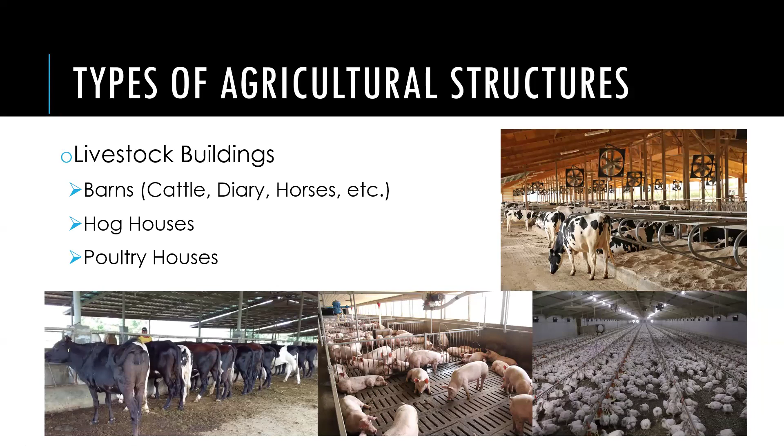Then meron tayong mga product storage building. We have the granaries, mga silos, vegetable storage, fruit storage, and beans. Dito naman natin ini-store yung mga na-harvest natin na commodities.

We also have crop production buildings such as greenhouses. Dito naman tayo nagpo-produce ng crops. Ba't ba tayo nag-greenhouse? Para ma-protect yung ating crops from the outside environment and mga pests.

Meron din tayong mga food and crop processing buildings such as milk houses, slaughterhouse, grain dryers, pasteurizing and bottling plants, fruits and vegetables production and packing. So sa mga buildings na to, dito natin pinoproseso yung mga commodities natin, mga crops, and syempre yung mga livestock.

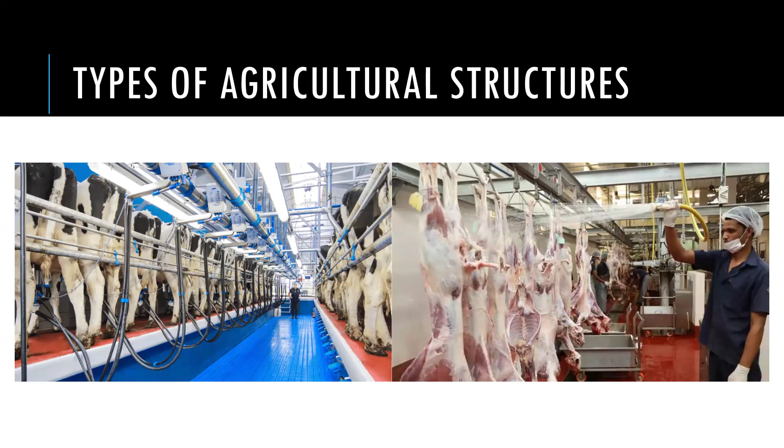So here we have a milking parlor, and we also have slaughterhouse. Meron tayong mga miscellaneous structures such as fences and mga manure pits.

So, basic structural elements. Meron tayong mga basic structural elements such as mga tension members, beams, compression members, and combined members. So these are present doon sa mga nabanggit nating structures kanina.

When we say tension members, ito yung mga tension structural members subjected to tensile strength. Example, itong tie rod na to and itong mga hangers. So they are all subjected to tension.

Next, we have beams. So these are structural members subjected to loads perpendicular to the long axis of the members. Normally in horizontal position, but sometimes found in an inclined and vertical position. So ito yung mga beams natin, mga biga.

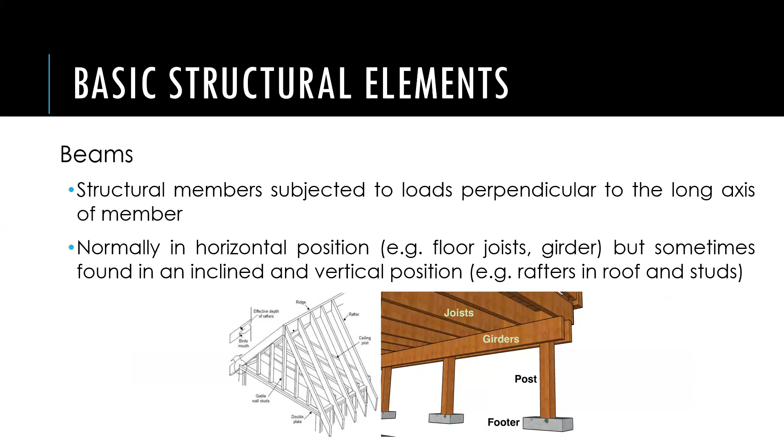Then meron tayong mga compression members. Vertical members that resist axial compression load. So ito naman yung mga columns natin. Ito mga to, ito yung mga beam. Then we have the column.

Then we also have combined members. So these are members that are subjected to the combined effects of compression and tension and bending.

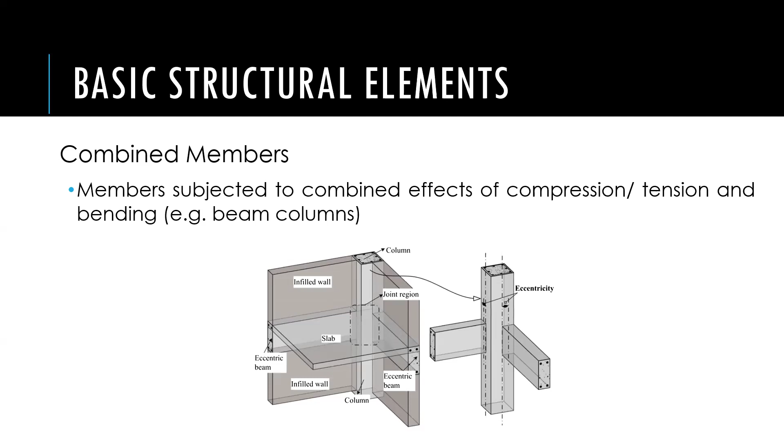When we say tension, results from a force that tends to stretch or elongate a member naman. So pag pinahaba yung member, tension naman yun.

Then we also have shear. Results from the tendency of two equal and parallel forces acting in opposite directions to cause adjoining surfaces of a member to slide on one another. So pagka-shear, parang compression or pwede rin siya parang tension, pero hindi magkasalubong, tawag dito, hindi magkapantay yung force. Kaya nagkakaroon ng shear deformation. Unlike sa tension, pahaba, sa compression naman, paikli yung mga members.

So stress is an internal resistance to an external force. Ang assumption natin kapag stress, uniformly distributed over the area and load is axial or perpendicular to the area. So the formula for stress is P over A, or external force over area.

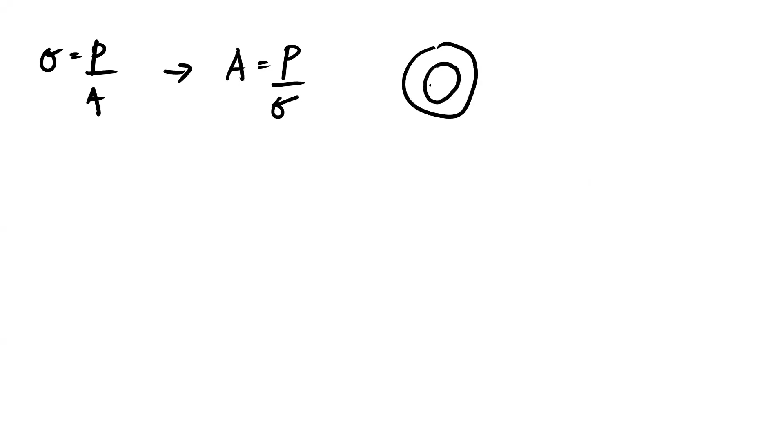So gawin natin, area is equal to P over stress. So ang area ng tube ay area ng outside minus area ng inside. Or pwede natin gawing pi, tapos d na malaki, d outside squared minus d inside squared, all over 4.

So is equal to dun sa force. Ano ba yung force natin? Yung load natin, tensile load is 400 kilonewton. So gawin natin. By the way, given na naman yung smaller diameter natin, no? So ito ay 100 mm squared.

That's squared. Is equal to 400,000 Newton. So ginawa ko ng Newton over 120 MPa. So bakit ganito yung ginawa natin?

Yan. So pwede natin itong gawing times 1,000,000. Yan. Gawin natin Pascal, parang Newton, Pascal, mm squared. So mm din yung makuha natin. Or pwede rin namang 120 megapascal. So automatic ang makukuha natin dyan is in mm.

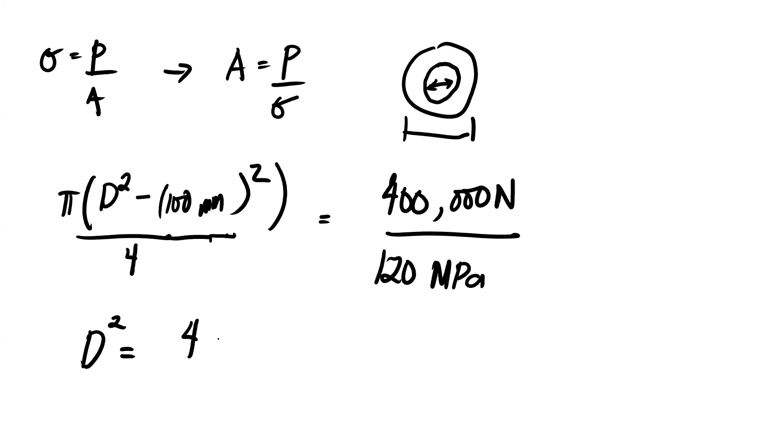D square root ng... balikan ko. 4 times 400,000 divided by 120.

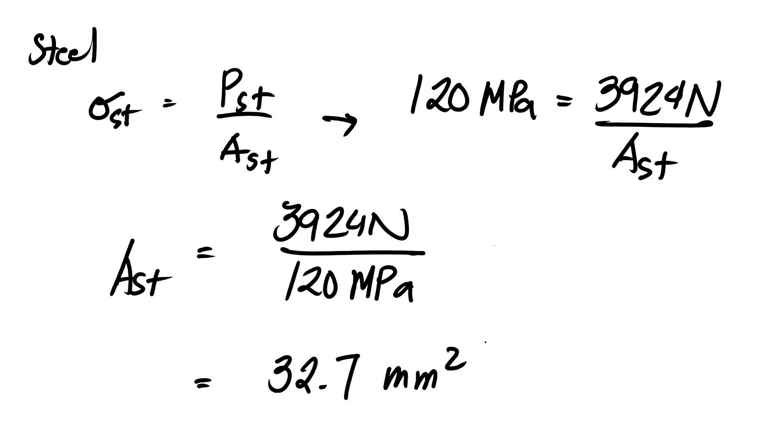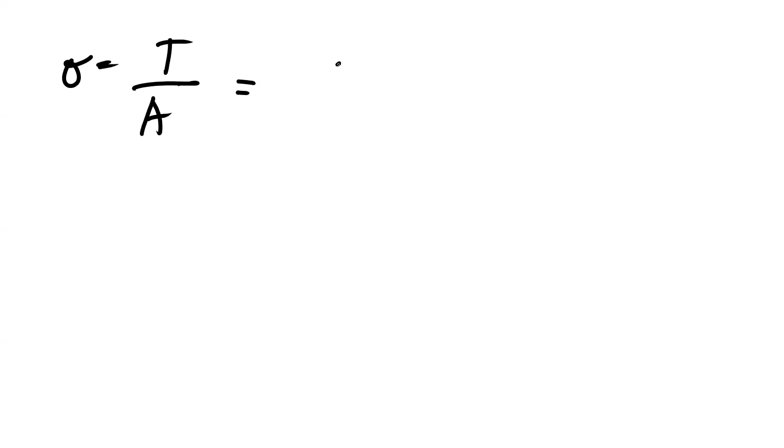So ang tension natin is 2957.134107 pounds divided by yung area, diameter is 0.6. Ito bilog to, 1/4 or pi over 4. Pi times 0.6 inch squared over 4. So makuha natin yung stress na equal sa 10,458.72246 PSI.

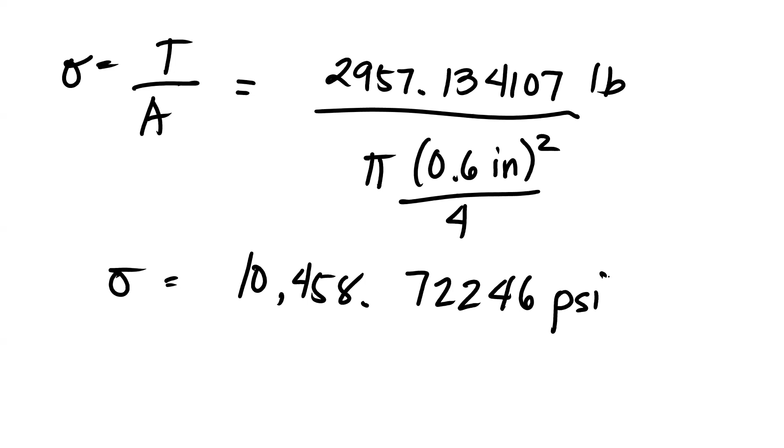Next. A rod is composed of an aluminum section rigidly attached between steel and bronze sections. Axial loads are applied at the positions indicated. If P is equal to 3,000 pounds and the cross-sectional area of the rod is 0.5 square inch, determine the stress in each section.

Okay, so kukunin natin yung stress sa bawat section na to. I-drawing muna natin. So meron tayo ditong rod, which is composed of steel, aluminum, and bronze. Tapos meron silang distance na 2 feet. So may length sila 2 feet, 3 feet, and 2.5 feet.

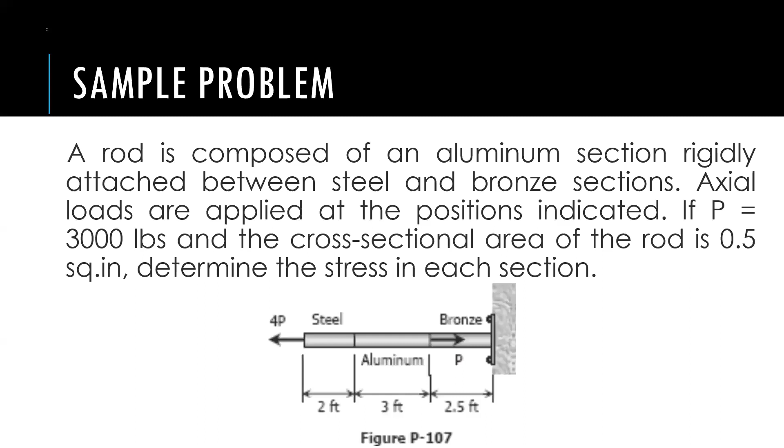Tapos meron tayo ditong force na P at meron tayo ditong force din na 4P. Sabi, P is equal to 3,000 pounds and area ng rod is 0.5 square inch. Area is 0.5 square inch. P is equal to 3,000 pounds. Okay, so paano natin ito isosolve? So una, solve muna natin yung kaunahan. Dito tayo magsisimula sa 4P kasi nandun yung external force na nahila.

So sa steel muna tayo, kunin natin yung stress. Stress is equal to anong force sa steel? So 4 times P pounds over 0.5 square inch. Kaya ang stress dito is equal to 24,000 PSI. Or pwede tayong gumamit ng ibang units, 24 KSI, kilopound per square inch. So may ganyan tayong unit.

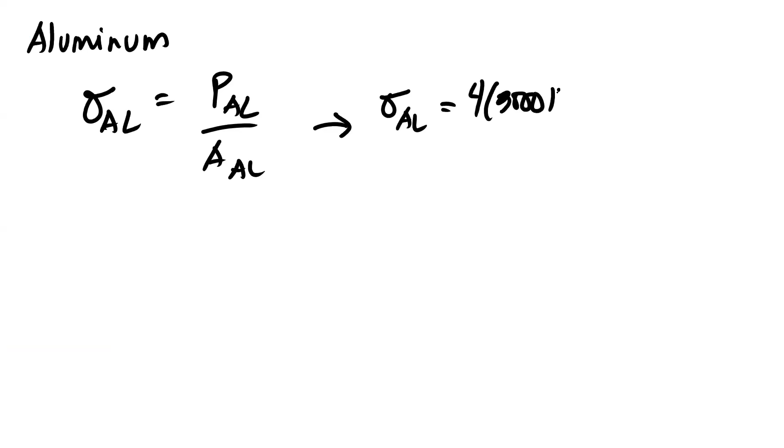Next naman, for aluminum. Kung babalikan natin yung figure, ito ay magre-react ng papaganito. Siyempre, dapat balanse. So since 4P yung reaction nito, therefore yung reaction din nito is 4P, para balanse yung ating equilibrium. So yung stress sa aluminum is equal to the force sa aluminum over area ng aluminum, which is equal sa 4 times 3,000 din over 0.5 square inch, which is the same na 24 KSI.

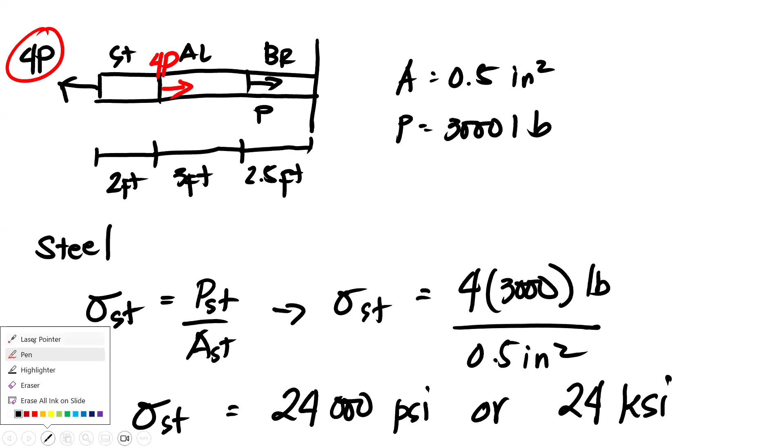So next for bronze naman, kung babalikan natin itong figure na to, kung nag-exert si aluminum ng 4P dito, mag-exert din ng 4P para in equilibrium. Kaya lang, since meron tayo ditong P, ibig sabihin yung force kay bronze ay isang papuntang 4P tsaka isang opposite, so 3P lang yung force kay bronze. Kaya kung sasolve natin siya, we have stress ng bronze equal sa force ng bronze over area ng bronze. So equal sa 3 times 3,000 pounds over 0.5 square inch. So ang stress kay bronze is equal to 18 KSI.

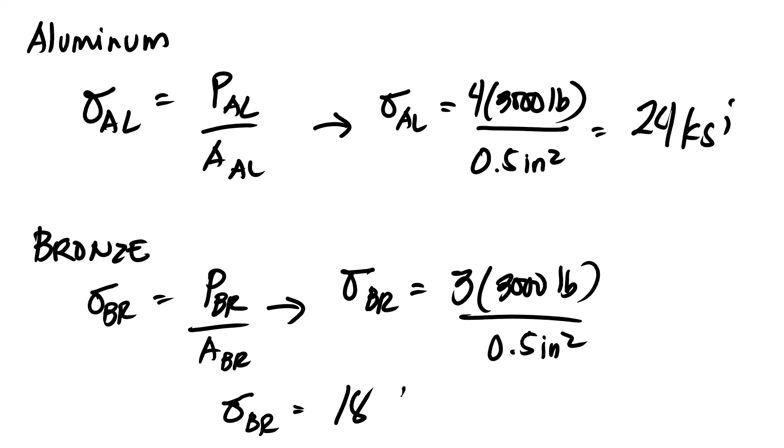Next. An aluminum rod is rigidly attached between a steel rod and a bronze rod. Axial loads are applied at the positions indicated. Find the maximum value of P that will not exceed the stress in steel of 140 MPa, in aluminum of 90 MPa, at ang bronze na 100 MPa. So let's try to draw this figure.

Medyo similar din naman yung magiging approach natin dito. So meron tayo dito bronze, meron tayong aluminum, at meron tayong steel. So this is 2.5 meters, 2 meters, so 1.5 meters. Meron yung force na 2P, dito may nagka-counter yan na P, dito naman 4P. Okay, so given din yung mga area nila.

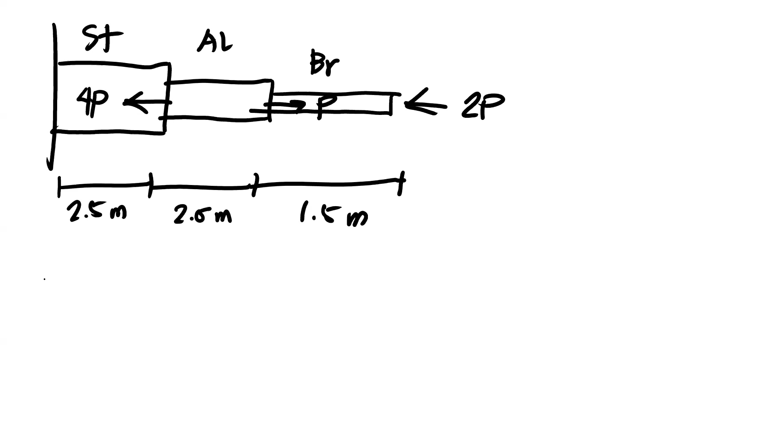Okay, unahin natin syempre yung kay bronze kasi nandun yung external force. Kukunin natin ang kabaligtaran naman ito, kukunin natin yung force dito. Okay, so hanapin natin yung value ng P. Paano natin gagawin yun? So yung force kay bronze, yung stress kay bronze is equal to force over area.

So, since missing yung force, given naman yung stress niya. Ano bang stress kay bronze? 100 MPa, no? So, 100 MPa times, is equal na lang. So, nawawala yung force.

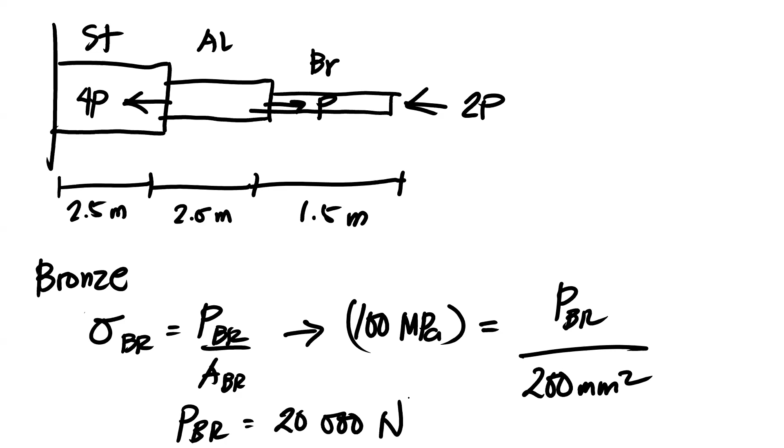Yung area naman ni bronze ay 200 mm squared. Force ni bronze. So, ang force kay bronze ay makakuha tayo ng 20,000 Newton.

Okay? Kaya lang, yung force kay bronze is equal to 2P. Therefore, ang hinanap natin is P, which is equal to 20,000 over 2. So, 10,000 yung makukuha nating, 10,000 Newton yung makuha nating P.

Okay. So, balance lang ngayon dito. So, since nag-counter na tong P na to, so, balance na siya.

So, para naman kay aluminum, so, di pwede natin kunin, no? So, stress ni aluminum, force kay aluminum, which is, pag nakita natin dito, P lang yung force niya. So, P na kay aluminum over area ni aluminum. So, stress kay aluminum is 90 MPa. Equal siya sa P aluminum over, ang area ni aluminum ay 400 mm squared.

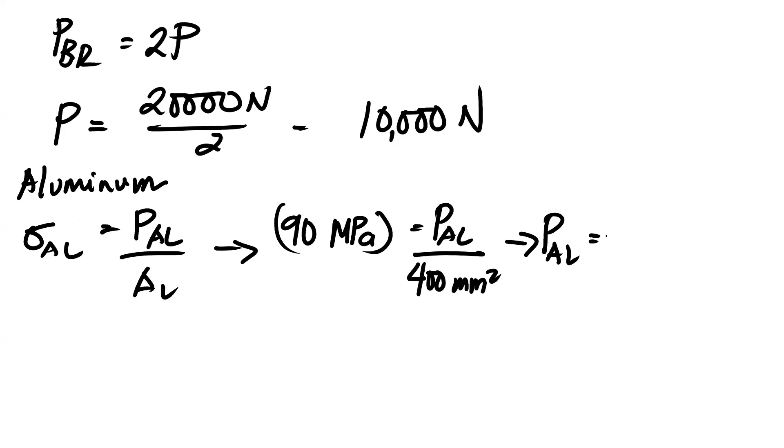So, kaya P aluminum is equal to 36,000 Newton. Okay. So, last, for steel.

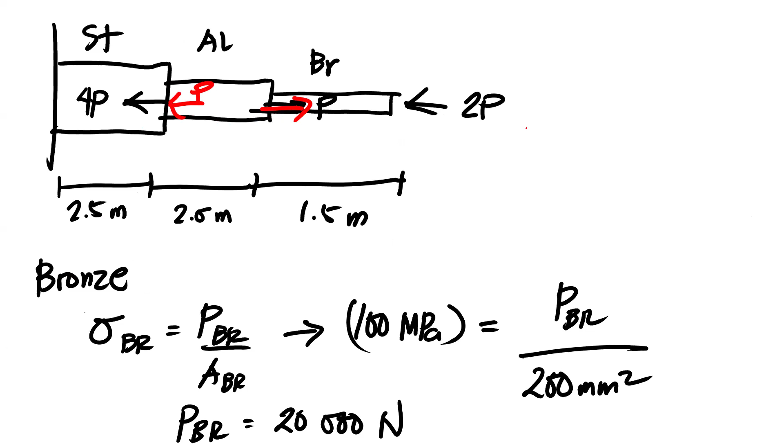So, since meron tayo ditong force kay aluminum na kapag ganito, so meron din siyang force dito para maging equilibrium na P. So, therefore, yung total force kay steel is equal to 4P plus P. Kaya magiging 5P na yung total force kay steel.

So, stress ni steel is equal to force ni steel over area ng steel. So, equals to sa ang steel ay nasa 140 MPa. Ang kanyang maximum is equal to sa, gawin na natin itong 5P. Over ang area natin ay 500 mm squared.

Therefore, P is equal to 14,000 Newton. Okay, so nakuha na natin yung mga dito, forces. Okay, next.

So, hindi pa pala tayo tapos dito kasi find the maximum value of P na gagamitin natin. So, based dito, ang gagamitin nating P ay 10,000. Okay? So, since yun yung safest value natin, pinakamababang value. Kasi kung 14,000 yung gagamitin natin, magpe-fail si bronze at si aluminum.

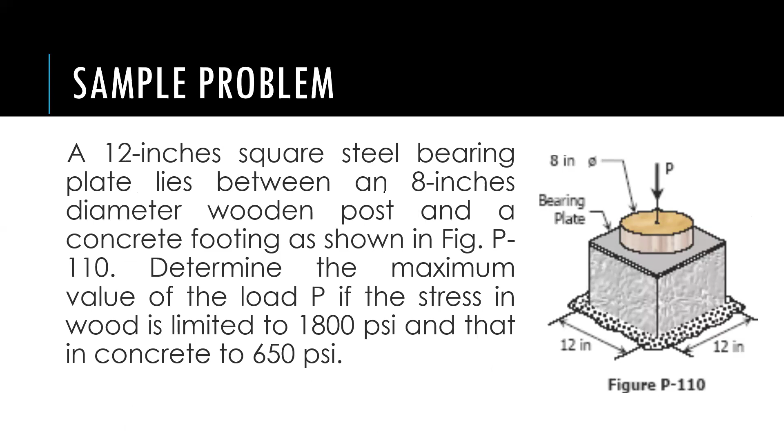So, next, 12-inch square steel bearing plate lies between an 8 inches diameter wooden post and a concrete footing as shown in the figure. So, determine the maximum value of the load P if the stress in wood is limited to 1800 psi and a concrete to 650 psi.

So, paano gagawin natin dyan? So, una, it's so for wood. So, para sa wood, so yung stress ni wood is equal to force sa wood over area ng wood.

So, given lang yung kanilang maximum allowable stress. So, si wood ay nasa 1800 psi equal to sa force kay wood over area ni wood. So, si wood ay bilog, it has a diameter of 8 inches. So, pi, 8 inch squared over 4.

So, ang force natin kay wood is 90,477.86842 pounds. Okay? So, tingnan naman natin para kay concrete.

So, para kay concrete, so, stress ni concrete is equal to force ng concrete over area ng concrete. So, stress ni concrete ay nasa 650 psi equal to sa force kay concrete over area ng concrete. So, ang concrete natin is 12 by 12 inches.

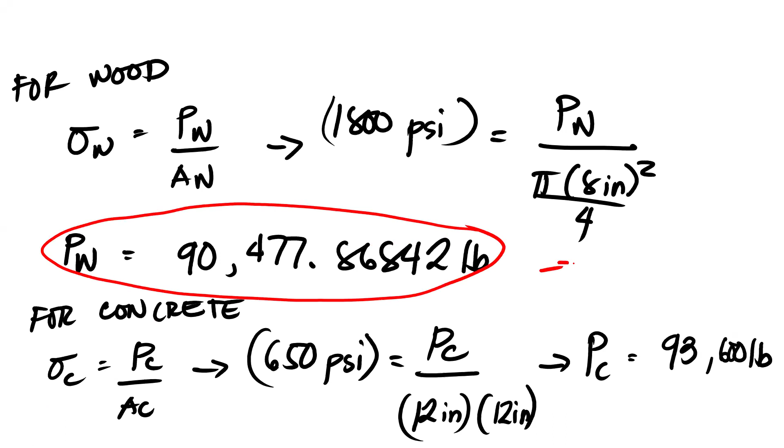So, pag hinanap natin yung P sub C, makukuha tayo ng 93,600 pounds. So, anong safe load na gagamitin natin? So, syempre, ito yung gagamitin natin na safe load. Bakit yan? Kasi mas mababa yung force dyan.

Kasi kung 93,600 pounds yung gagamitin natin, pwedeng hindi pa sira si concrete, pero yung wood natin, masisira na. Next.

Okay, so, i-redraw natin yung figure. Lagyan natin ng force. So, ito is smooth pin, dalawang force sa kay A, kay F naman, roller, isa lang. Tapos, meron tayong 30 kips. Okay?

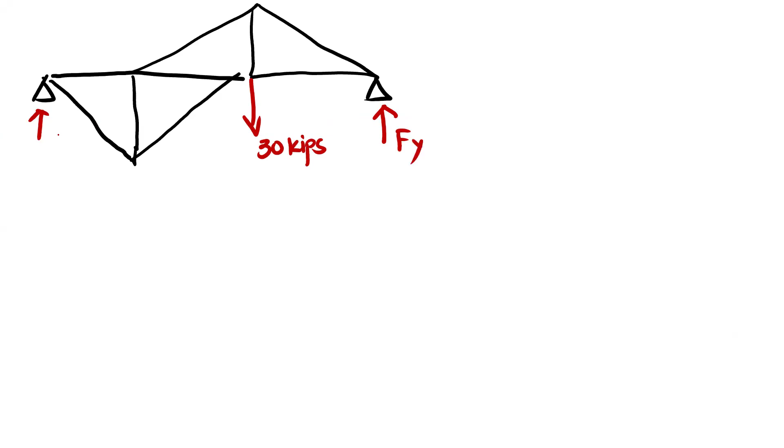So, drawing natin yung mga forces. So, meron tayo ditong 30 kips. Meron tayo ditong isa. Tawagin mo itong FY. Ito, tawagin natin to AY. Dito may AX din. So, lagyan natin ng sukat. 8 feet, 8 feet, 8 feet. So, this is 6 feet. This is also 6 feet. And then, yung mga label. So, this is A, B, C, D, E, F. Okay.

So, paano natin ito isosolve? Okay. So, syempre, pinakauna, isolve natin yung mga reaction forces. So meron tayo AXAY dito, tsaka dito naman, we have FY.

So, kung magsa-summation tayo ng force sa X, nawawala yung AX. So, missing. So, hindi pwede ito. Kung magsa-summation naman tayo ng forces sa Y, missing yung AY, tsaka yung FY. So, hindi rin pwede itong method na to.

So, ang choice na lang natin is to use moment. So, saan tayo mag-moment? So, pwede kay A, pwede kay F. Pero dito, in this case, mas madali sa A mag-moment kasi dalawa yung force missing on A, mahanap agad natin yung sa F. Okay?

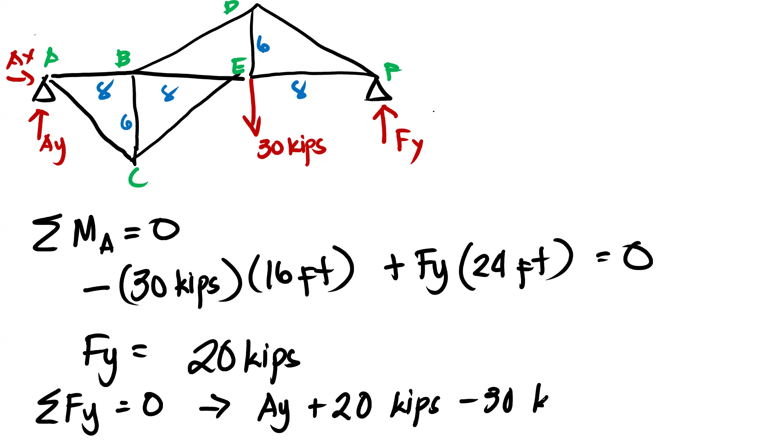We have 20 kips. So next, since nakuha na natin yung Fy, pwede tayo ngayon mag-summation ng force at Y para maging 0. So ano ba yung missing? Meron tayong AY plus 20 kips minus 30... wait, this is not 20,000, this is 20 kips lang kasi naka-1,000 na nga pala to. So 20 kips minus 30 kips. So ang sagot natin dito ay 10 kips.

So tamang assumption natin na pataas yung AY. Next, isasolve natin - since halos okay na yung mga forces along Y, yung X na lang mahirap hanapin kasi wala tayong ibang value. So pwede na siguro tayo mag-calculate ng stresses dito sa CE, DE, and DF. So saan tayo pwede magsimula? Alam ba natin yung kukumpute na mga forces? Compute natin itong CE, DE, tsaka DF - etong tatlong members na to.

Since alam natin yung mga forces dito sa FY, dun tayo magsimula. I-isolate natin yung member na yon. Eto si D, eto si F, eto naman si point E. I-drawing natin yung mga forces acting on those joints. Si F, isa, si Fy, alam na natin to. Then mag-a-assume ako na si DF ay papaganito, si EF ay papaganyan - assumption lang naman yan. Pagka negative yung naging sagot ko dito, ibig sabihin baligtad yung assumption ko.

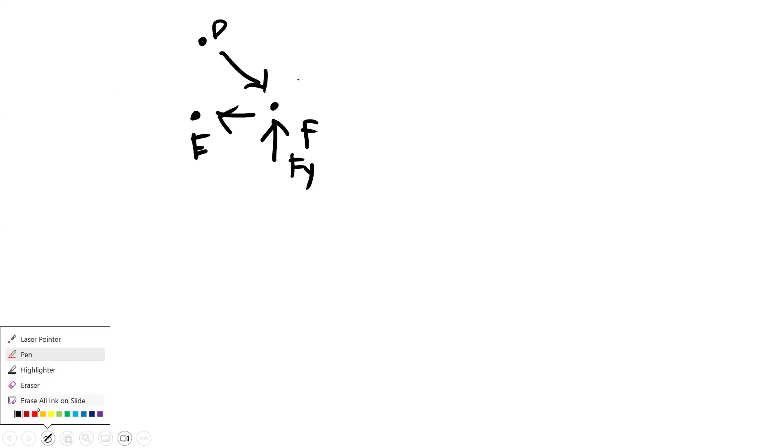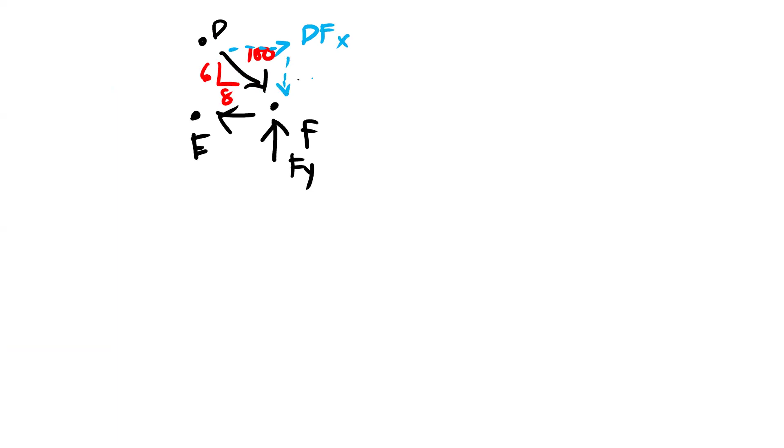Okay, since si DF ay slanting position, at meron tayo similar triangle dito na 6, 8, 10, at 6, 8, 10 - similar triangle yan. So si DF dyan ay meron niyang component na DFX tsaka DFY. Paano natin isosolve si DF? Pabalik lang tayo - tatlo lang naman gagamitin natin: summation of force of x, summation of y, tsaka summation ng moment.

Kung titingnan natin, ang meron lang tayong force dito ay itong 20 kips na vertical, kaya magsa-summation y tayo. At ang mga force acting on this joint lang ay itong Fy tsaka yung pababa natin na DFY, equals to 0. So si Fy ay 20 kips minus yung DFY natin. Paano natin kukunin yung DFY? This is 6/10 times DF is equal to 0. So with that, we can get the value of DF, which is equal to 33.33 kips.

Okay, at since pababa itong DFY, pababa siya sa member, so it is compressing the member or the joint F. So this is compression.

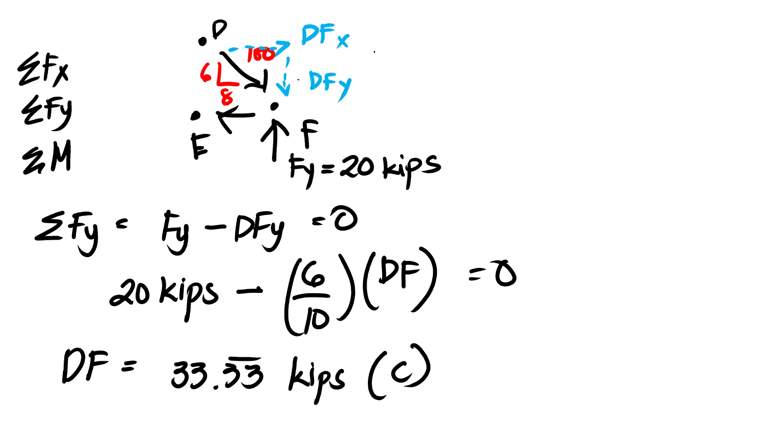Okay, next naman at joint D. Bakit hindi natin sinolve tong si EF? Hindi naman kasi siya pinapasolve eh, so kaya wag na natin i-solve. So at joint D, pag dinrawing natin, this is joint D. Since sa joint F kapag ganito yung force ni D, so kabaligtaran naman siya, no? Pag kay joint D, pataas naman, so tagalin ko na to. Then since kung titingnan natin, ito yung D, E, B, F - symmetrical to, no? So by symmetry, pag ganito si BD, ito si force na DF.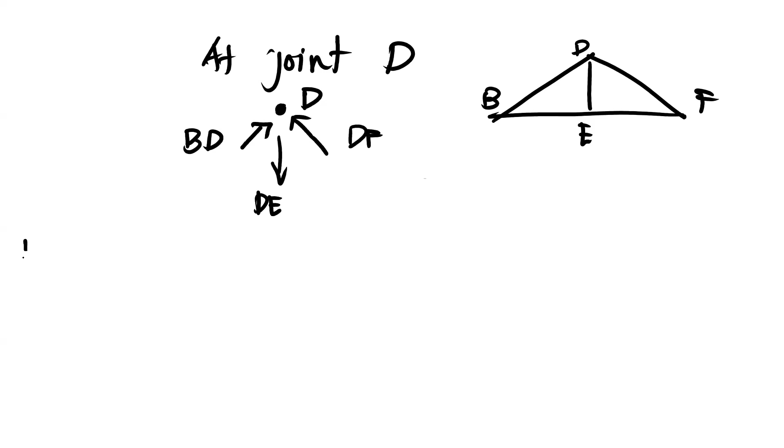And then we have, let's say, papaganto natin ilagay si DE. So by symmetry, force ng BD is equal to DF, which is equal to 33.33 kips. Okay, so ang kulang lang natin is DE.

Paano natin hanapin yung DE? Meron tayo ngayong vertical force, no? Si DF meron siyang force na pataas, pati si BD, so meron na yung BDY tsaka DFY. Since vertical yung mga forces natin, magsasummation tayo ng at Y. Si DFY is equal to - tingnan natin ito by symmetry, or by similar triangle rather. So by similar triangle, this is 6, this is 8, this is 10. Also this one is 6, 8, and 10. Kailangan natin ay yung vertical force. So we have 6/10 times value ni DF na 33.33 kips, plus si BD naman, 6/10 din siya times 33.33 kips, then minus si DE - kasi pababa kaya minus DE is equal to 0. So pag hinanap natin ng DE, makukuha natin ay 40 kips. Since si DE ay palayo kay point D, ito ay tension.

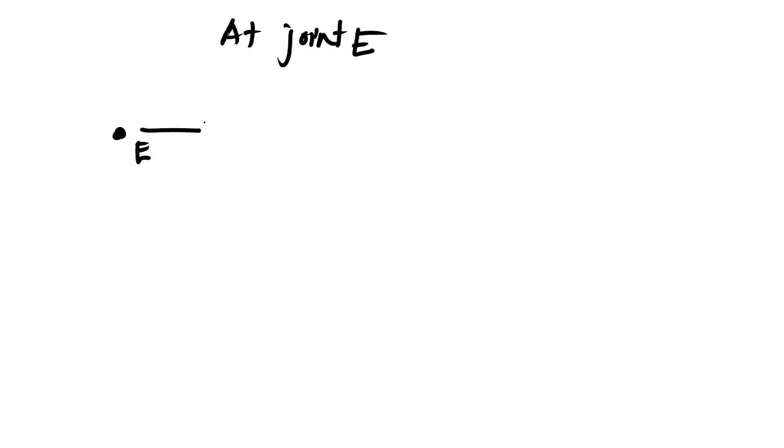Okay, so nakukuha na natin yung mga value. Isa na lang kulang natin, C, CE. So at joint E - pag dinrawing natin yon, ito yung joint E, meron tayo dito papuntang EF, meron tayo dito pataas, so kabaligtad na naman siya kay DE, kasi hinihila nga siya. Si DE nga ay tension eh. Tapos si BE naman dito, hula ko lang to si BE, na ganito yung direction niya. Then meron tayo ditong 30 kips. At 30 kips. Tapos meron tayo ditong CE na naka-6, 8, 10 ulit yung similar triangle niya. So ang kailangan nating mahanap ay yung sa CE. At si CE, meron siyang CEY tsaka CEX na component.

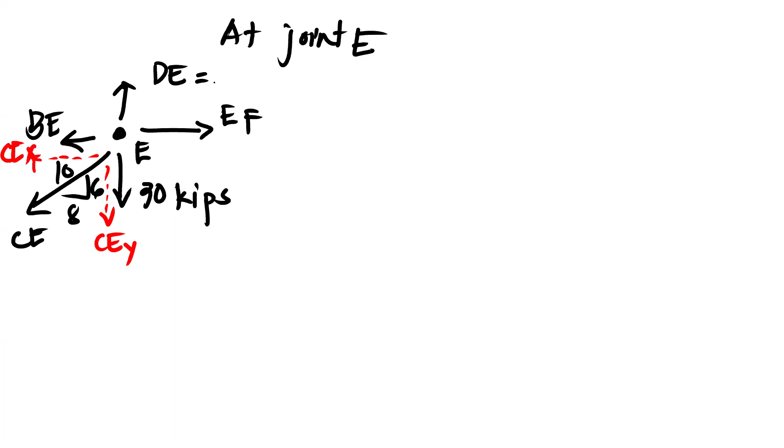Since marami tayong vertical force na alam, si DE ay 40 kips na tension. So para mahanap yung value ng CE, magsasummation tayo ng vertical forces. Summation ng Y, ano-ano yon? Meron tayong negative 30 kips na pababa, positive 40 kips na pataas, at since pababa si CEY, this is 6/10 times CE is equal to 0.

So pag ginanap natin yung value ng CE, we have 50/3 kips. Which is since pababa siya, hinihila niya yung joint E, so this is a tension.

Nakuha na natin yung mga forces acting on each member. Summarize ko lang. Kulang pa pala ako, wait lang. Mag-a-add lang ako ng ano. Okay, nakapag-add na ako.

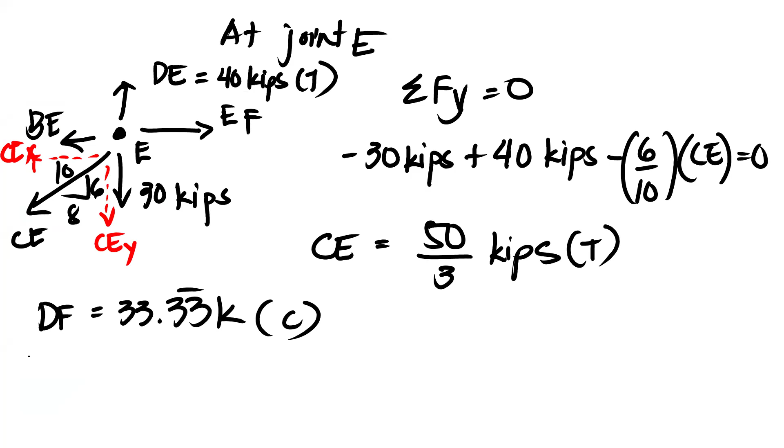I-summarize natin: si DF ay 33.33 K na compression. Si DE naman is 40 K kips - this is compression, this is tension. At saka meron tayong CE na 50/3 kips na tension din. Pero hindi yan yung pinapahanap sa atin.

Kung babalikan natin ang problem, pinapahanap is stress. So hanapin natin yung stress ng bawat member. Stress ng CE is equal to force niya over area na given na 1.8 inch squared. Kaya makukuha natin dito is 9.259259259 kilopounds, K.

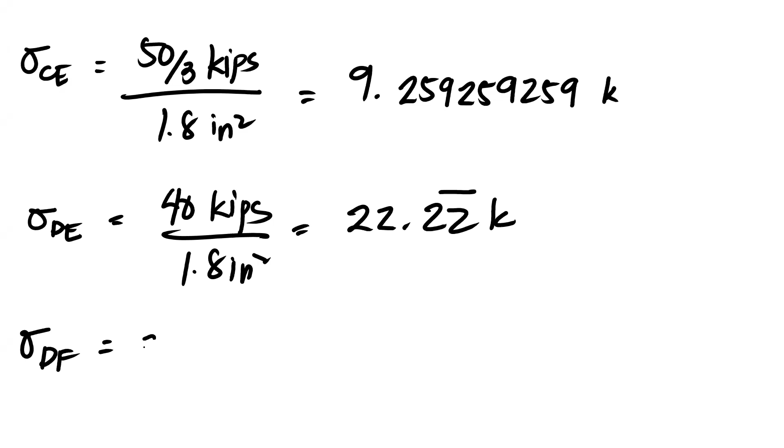Then for DE, 40 kips over 1.8 inch squared, we have 22.22 K. At lastly sa DF naman, meron tayong 33.33 kips din over 1.8, so we have 18.518 na paulit-ulit K. Yan yung mga stresses natin.

Okay, next nating topic naman ay bearing stress. What force is required to punch a 20 mm diameter hole in a plate that is 25 mm thick? The shear strength is 350 meganewton per meter squared. So this is bearing stress, at ang formula pagka bearing stress, V is equal to τA. So V is the shearing force, which is equal to the punching force.

Yung τ naman natin dito, ito yung bearing stress. Given yung shearing strength niya na 350 meganewton per meter squared, hanapin natin yung punching force. Paano natin gagawin yun? Given na 350 to.

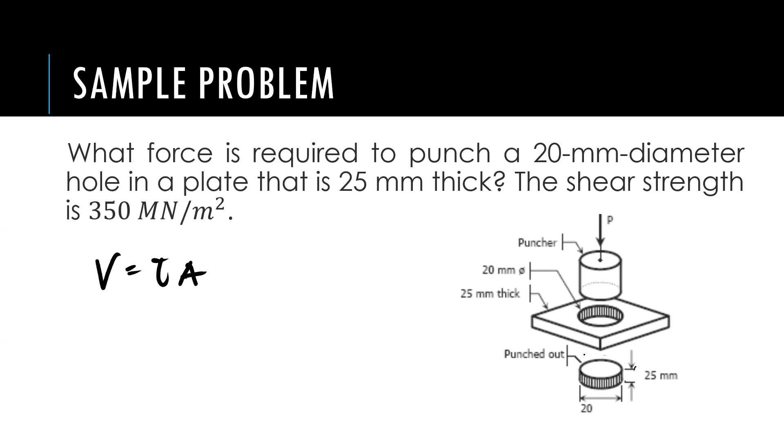Since ito ay pabilog at pagka tinuwid natin, yan ay rectangular. Kailangan natin thickness na diameter - basically ito ay circumference times thickness. Kaya pi times ang diameter natin ay 20 mm times ang thickness natin is 25 mm. Pagka diniretso natin to, automatic ang sagot natin is Newton na lang. So the answer is 549,778.7144 Newton. Ganun lang kasimple.

Next: A hole is to be punched out of a plate having a shearing strength of 40 ksi. The compressive stress in the punch is limited to 50 ksi. Compute the maximum thickness of the plate with a hole of 2.5 inch in diameter that can be punched. And if the plate is 0.25 inch thick, determine the diameter of the smallest hole that can be punched. Magkabaligtad naman, so sa A muna tayo.

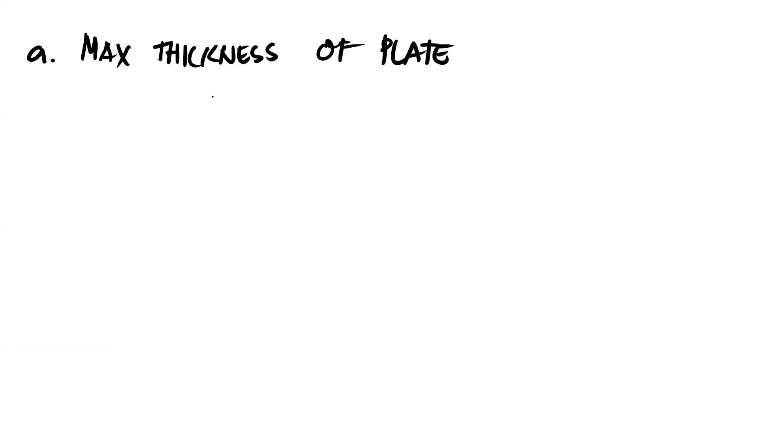Okay, compute muna natin yung max thickness of the plate. Paano natin kukunin yun? Yung stress natin is 50, yung limited - okay, yun yung pinakamataas na force, so yun yung gagamitin natin, hindi yung 40.

Yung P natin is equal to the punching force, which is P is equal to maging PA na to. So P is equal to 50 KSI times pi to area. Ang hinanap natin is maximum thickness of plate with a hole of 2.5 inch in diameter that can be punched. Yung area natin is equal to 2.5 squared pi over 4. So makuha natin na punching strength is 245.4369261 kips. Ito yung punching strength natin.

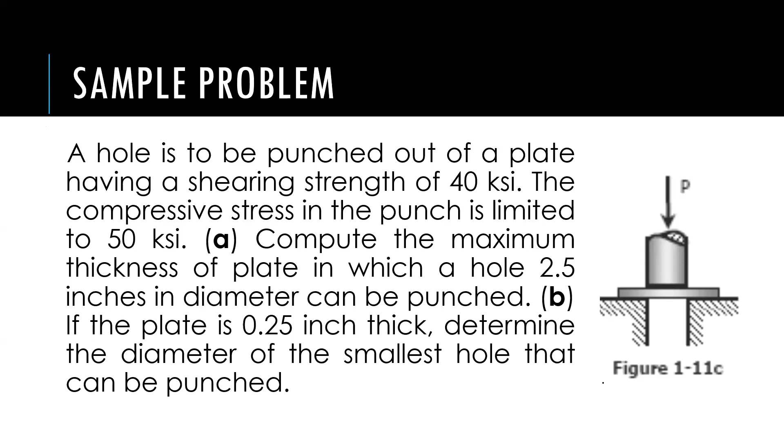Next, letter B, yung 0.25 inch naman yung thick ng plate. Determine the diameter of the smallest hole that can be punched. Kabaligtad naman, so B is diameter of smallest hole. Computin muna natin yung compression nito.

So, yung force na kaya natin is 50, yung limit natin, times pi over 4 times d squared. Hindi natin alam yung minimum area, so pagka i-compute natin, 12.5 pi d squared. Yan yung punching force natin.

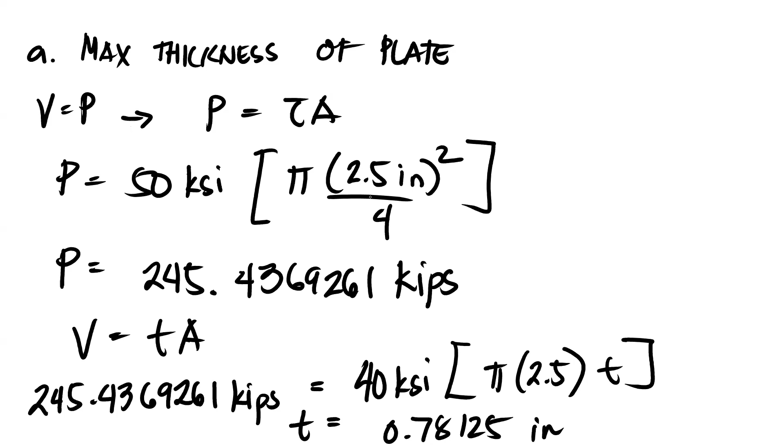Hindi natin alam yung diameter, tapos given yung thickness na 0.25 inch. So pag inanap natin yung diameter, makuha natin is 0.8 inch. Yan yung diameter na kayang i-punch if 0.25 inch thick naman yung plate.

Okay, so that's all for short review ng strength of materials. So next naman natin ay itong materials of construction. Aside from dun sa naituro ko dati na method sa pag-estimate ng mga materials, meron pang ibang formula na pwede nating gamitin. Pero mag-introduction tayo dito.

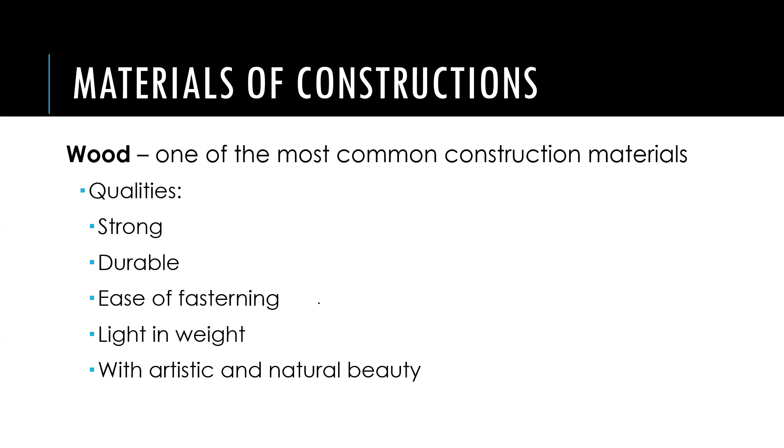Yung wood is one of the most common material na ginagamit natin for construction. It is strong, durable, madali siyang i-process, light in weight, and may artistic natural beauty. Meron tayong mga recommended uses ng Philippine timber depending upon the strength group, from high strength class 1 to low strength class 5. Meron mga end uses yan kung saan magandang gamitin.

Plywood is a material that's made up of 3, 5, 7 or more veneer slices laid one upon the other with grain of each at right angles to those of the sheet above and below. Yung thickness nito can be 3.2, 4.7, 12, 20 with a normal width of 1.2 and a length of 1.8 to 2.4. Normally, ang mga plywood natin is 4 by 8 feet yung kanyang sukat.

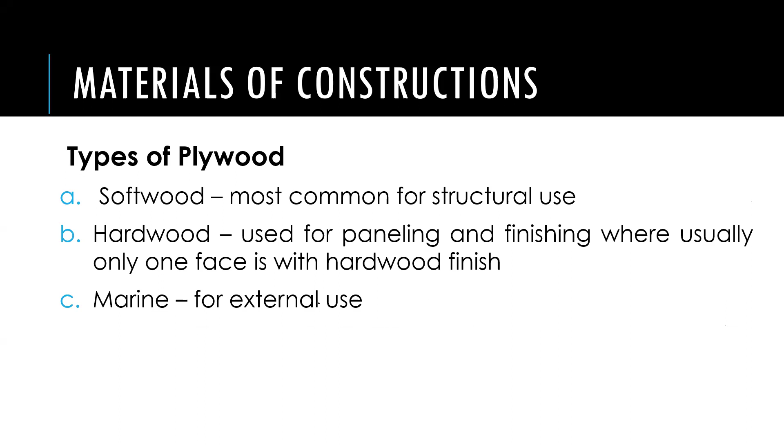We can classify plywood as softwood, hardwood, and marine. Softwood, most common for structural use. Hardwood, used for paneling and finishing, where usually only one face is with hardwood finish. And marine is for external use.

Lumber measurement: wood is normally priced in board foot. One board foot of wood has a normal size of 1 foot length by 1 foot width by 1 inch thick. Ito yung formula natin ng board foot: length times width times thickness over 12. Dapat ang unit nila is feet, inch.

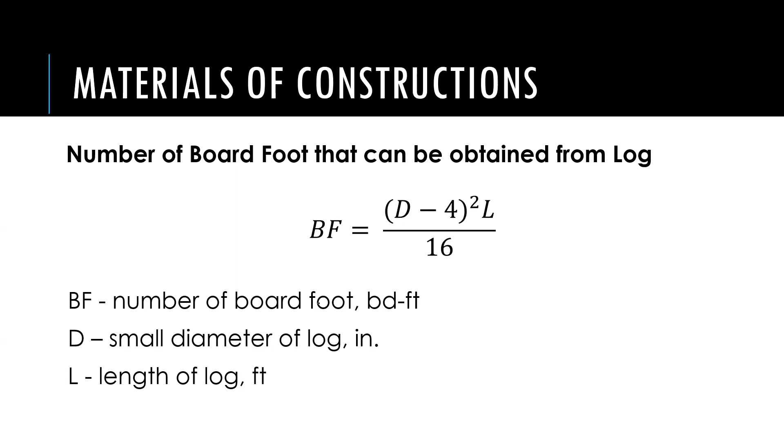Halimbawa, kung meron tayong isang log and we want to determine the number of board foot that we can obtain from that, this is the formula: d minus 4 quantity squared times the length of the log divided by 16. D is diameter in inch, L is in feet.

We also have nails requirement. The weight of the nails is equal to 20 times the number of board foot over 1,000. So let's try this one.

Compute the cost of 50 pieces na 2 by 3 by 12 lumber at 27 pesos per board foot. Kunin natin yung number of board foot. Sabi ay naka feet, feet, inch. Ito naman ay naka feet, inch, inch. Meron tayong feet, meron tayong inch, meron tayong inch. Pwede na nating i-direct sa formula, sa meron tayong feet, inch, inch. So ganun kadaming board foot to? We have 6 board foot.

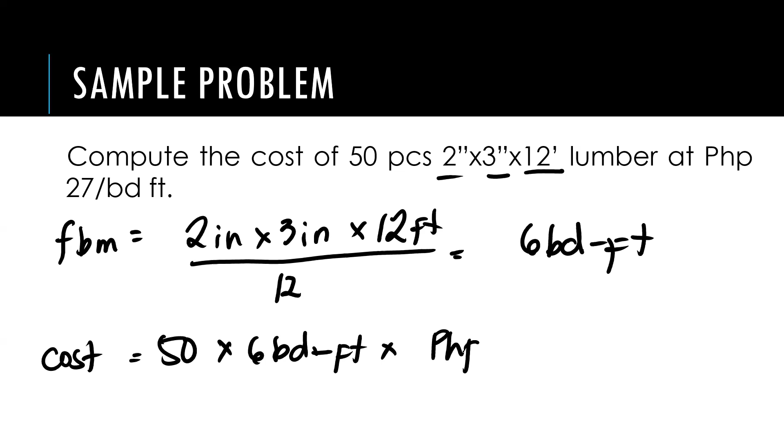Pag kinompute natin yung cost, we have 50 pieces times 6 board foot times 27 pesos per board foot. So ang total cost natin is 8,100 pesos.

Next. A log has a 24-inch diameter and 18-foot length. What is the total number of board foot that can be obtained from the log? Board foot is equal to D minus 4 squared L over 16. Diameter natin is 24, minus 4 squared. Ang length natin is in feet, so this is 18 over 16. So total board foot natin is 450 board foot. Simple lang yung mga equation natin.

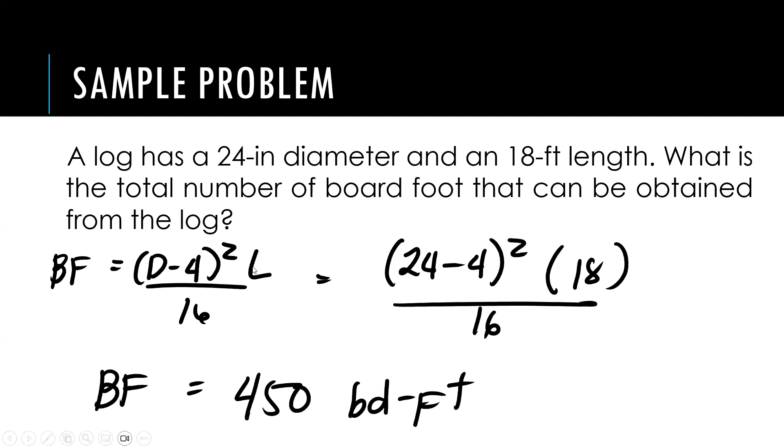Next. Determine the number of board foot that can be obtained with a log of smaller diameter 1.75 meters and 5 meters in length. Ito, mahirap lang ng konti kasi kailangan natin mag-convert. We have 1.75 meters, or gawin ko na itong cm, times 1 inch over 2.54 cm, minus 4, quantity squared, times 500 cm times 1 foot over 30.48 cm, over 16. So total board foot natin dito is 4,318.10141 board foot. Okay?

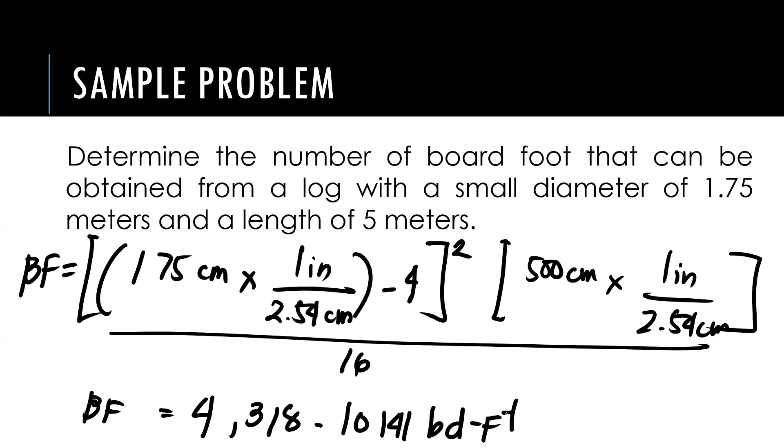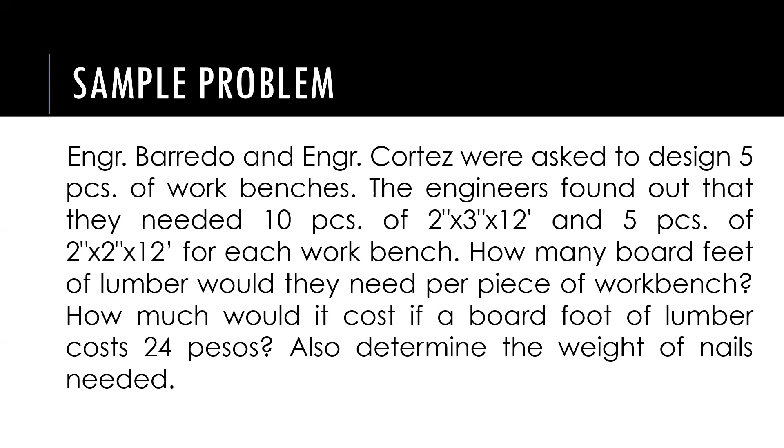So hindi na natin kukunin to since hindi na natin times sa 5 pieces of workbench, kasi per workbench naman. But if we would like to determine the total cost, let's say yung cost per workbench. Kung sa total, we have 80 board feet times 5 bench, so meron tayong 400 board feet para sa lahat. And yung cost niyan, 24 pesos per board feet, so meron tayong 9,600 pesos. Para naman sa number of nails, we have 20 times yung board feet natin over 1,000. So lalabas na ang weight of nails na kailangan natin is 8 kg.

So yan yung mag-estimate ng dami ng board feet at ng weight of nails needed for that project.

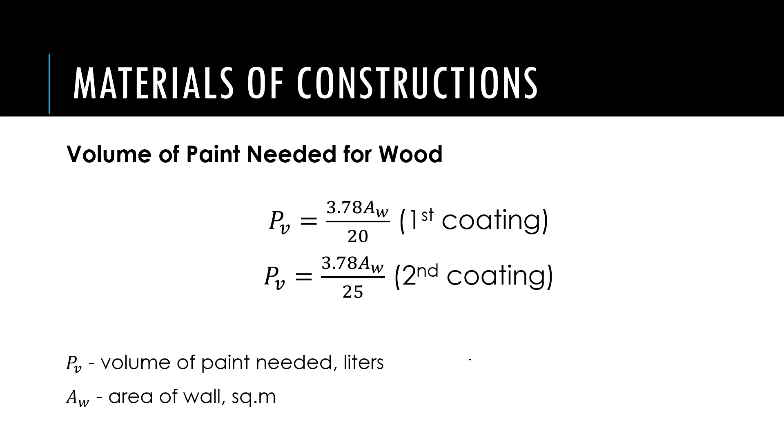Next, we have volume of paint needed for wood. So sa first coating, 3.78 times area ng wall or ng wood over 20. Pagka naman second coating, 3.78 times area over 25. So in liters na yung makukuha natin.

Engineer Motas would like to paint her living room whose dimensions are 10 by 20 by 5. To determine the paint needed, if she will be using white paint for the first coating and neon pink for the second coating. Floor, ceiling, and area of windows are excluded. So yun muna yung assumption natin.

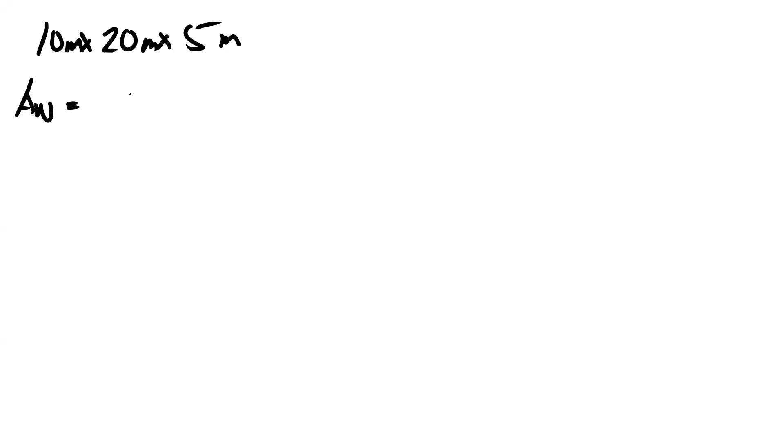So we have 10 by 20 by 5 meters, and yung wall natin, let's compute na lang yung area. So yung total area natin is dalawang 10 by 5 tsaka dalawa ding 20 by 5 meters. So ang total area natin dito ay 300 square meters.

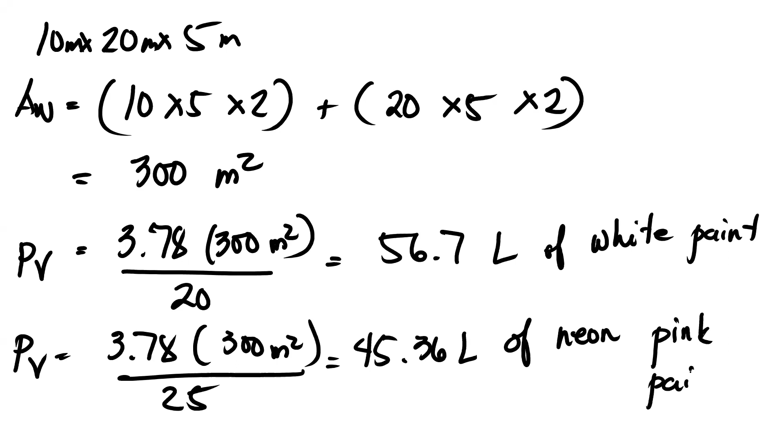So for the volume of paint needed, we have 3.78 over 20, ito para sa first coating. Lalabas dito is 56.7 liters of white paint for the first coating. Para naman sa second coating, over 25 naman to, so kailangan natin ng 45.36 liters of neon pink na paint. Okay, so ganun lang mag-estimate.

So next material of construction is the concrete. It is a combination of cement and aggregate, fine and coarse. Aggregates can be sand, broken stones, or gravel, cinders, blast furnace slag, etc. Concrete is used in footings, wall and column foundations, slabs, pavements, and beams. Concrete is less common in farm structures, and when in use, concrete is always reinforced by steel bars to help the concrete in shear and tension. Ano bang qualities ng concrete? It's durable, hard, mataas yung strength niya in terms of compression, and it can be formed in various shapes.

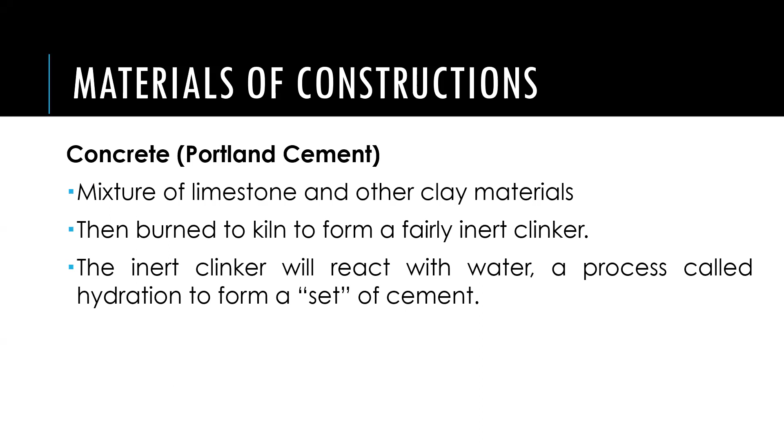So concrete, mixture siya ng limestone and other clay materials. They burn sa kiln to form a fairly inert clinker, and the inert clinker will react with water, a process called hydration, to form a set of cement. So aggregates, applied to sands, broken stones, or gravels na pinagbibind-together ng cement. We have fine aggregates, passes through 1/4 inch screen or 6.35 mm. Pagka naman coarse aggregate, nare-retain sila sa 1/4 inch screen or sieve, so greater than 6.35 mm.

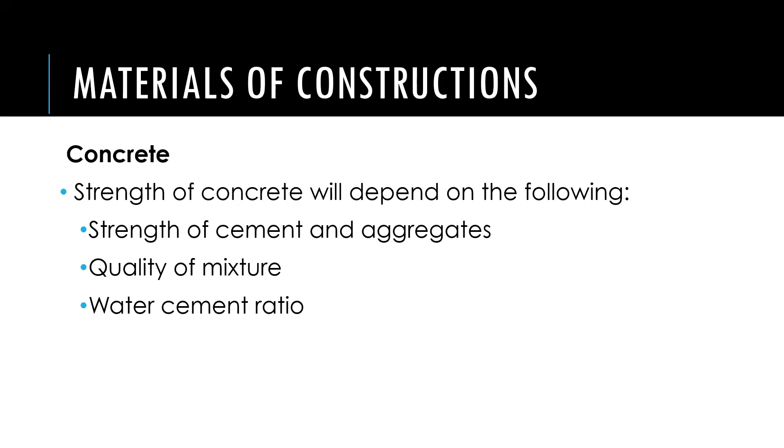So concrete, strength of concrete will depend on the following: strength of the cement and aggregates, quality of mixture, and water-cement ratio. Kapag nag-mix tayo ng cement at water lang, tinatawag natin yung paste. Pagka cement, water, and sand, mortar naman. At meron tayong specially formulated mortar na tinatawag na grout. Ano bang function ng mortar? Used to bond units together, seal spaces between units, ties steel reinforcement and anchor bolts into the wall, and provide design lines of color and shadows.

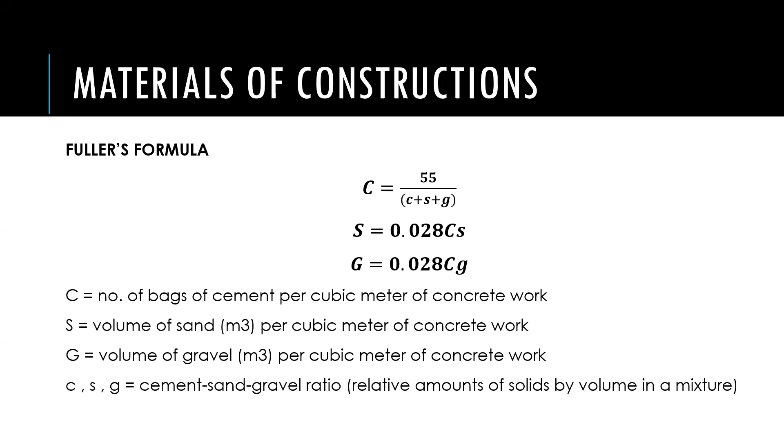Aside from the material estimation na ituro ko, we also have the Fuller's formula, mabilis din to estimate the number of bags of cement, volume of sand, and volume of gravel. Yung C is equal to 55 over C plus S plus G. Ano yung maliliit na C, S, G? Ito yung cement, sand, gravel ratio. And then to compute for the gravel and sand, it is 0.028 CS and 0.028 CG. So ito yung mga mixture, C plus S plus G, pag-a-addin lang natin yung mga yan.

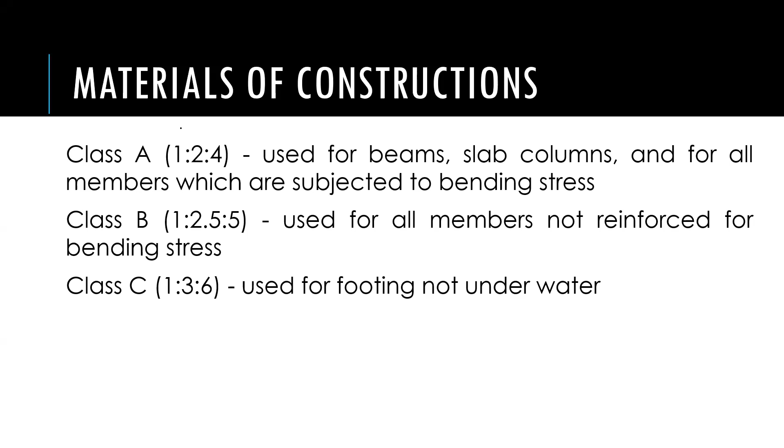So ito yung mga classes natin. Class A, 1 is to 2 is to 4, ito yung cement, sand, and gravel, used for beams, slabs, columns, and for all members which are subjected to bending stress. Class B naman, 1 is to 2.5 is to 5, used for all members not reinforced for bending stress. And Class C, 1 is to 3 is to 6, used for footing not underwater.

CHB, most widely used masonry materials for all types of construction: walls, partitions, dividers, fences, etc. We can classify CHB as bearing or non-bearing. Pagka bearing, its thickness ranges from 15 to 20 cm and are used to carry load aside from its own weight. Pagka naman non-bearing, thickness ranges from 7.5 to 10 cm and are intended for walls, fences.

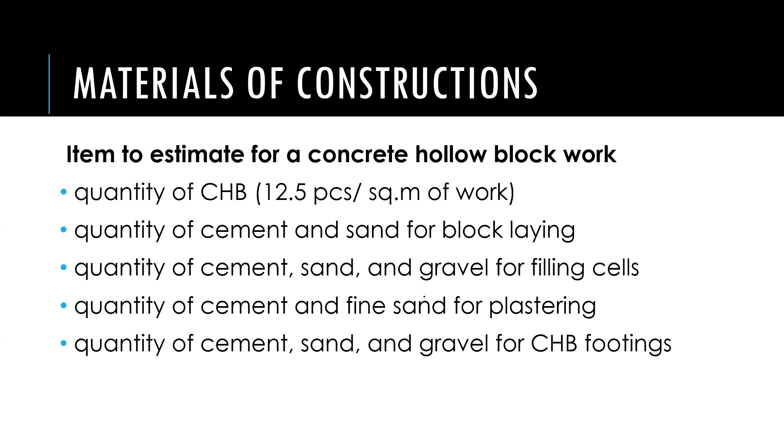So pag nag-estimate tayo for a concrete hollow block wall, we need to quantify the amount of CHB. So ito yung rule natin na there are 12.5 pieces of CHB per square meter of work. Then we also need to quantify the amount of cement and sand for block laying, cement, sand, and gravel for filling cells, cement, and fine sand for plastering, and cement, sand, and gravel for CHB footings.

We also have some rough estimates na there are 100 board foot per cubic meter of lumber, para naman sa cement, 10 bags per cubic meter of plaster. Steel reinforcement, 100 to 120 kilograms per cubic meter of concrete.

Sa roof framing naman, 14 board foot per square meter of roof area. For ceiling framing, 7 board foot per square meter roof area. Sa nails, kailangan natin 20 kg per 1,000 board foot. At sa studding naman, 2 by 3, 4 board foot per square meter.

Okay, sa sidings naman, kailangan natin ng 10.7 board foot per square meter. Para sa flooring, 10.8 board foot per square meter. Floor joist na 2 by 6, 15 board foot per square meter. Ceiling joist 2 by 2, 4 board foot per square meter. Sa purlin naman, 2 by 4 na 4.4 board foot per square meter.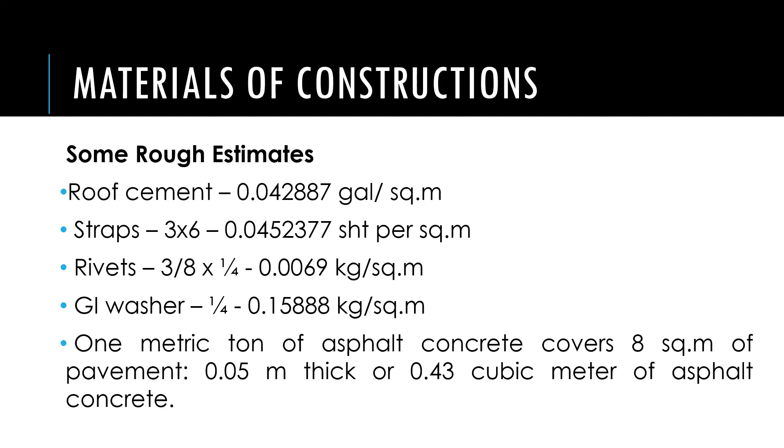1 metric ton of asphalt concrete covers 8 square meters pavement, 0.05 meters thick, or 0.43 cubic meter of asphalt concrete.

Try natin mag-solve ng mga ito. So, Engineer Panabal would like to cement the flooring of their pallet warehouse with a total volume of 1,500 cubic meters. Determine the number of bags of cement and volume of sand and gravel required using 20 liters of water for every bag of cement and a 1:2.5:5 na mixture.

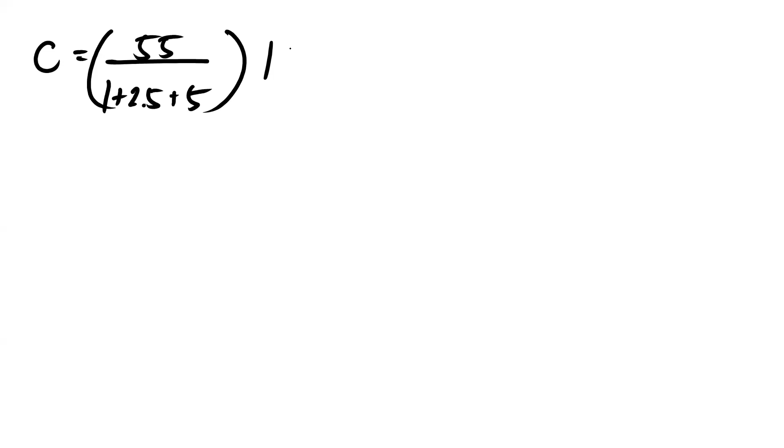So paano gagawin natin? We need to compute for the volume of cement. Paano natin i-compute yung cement? Gagamitin natin Fuller's formula: 55 over C plus S plus G. So ito yung C plus S plus G natin. Then multiply natin ito dun sa volume, kasi itong formula na ito, per cubic meter lang. Kailangan natin i-multiply sa volume ng concrete work.

So ang answer natin dito is 9,705.882353 bags per cubic meter. So yan, wag muna tayo round off.

Para naman sa sand, so formula: 0.028 yung cement natin, times yung ratio ng sand. So this is equal to 679.4117647 meter cube ng sand.

At para naman sa gravel, kailangan natin siyang i-multiply dun sa ratio ng gravel. So, 1358.823529 meter cube.

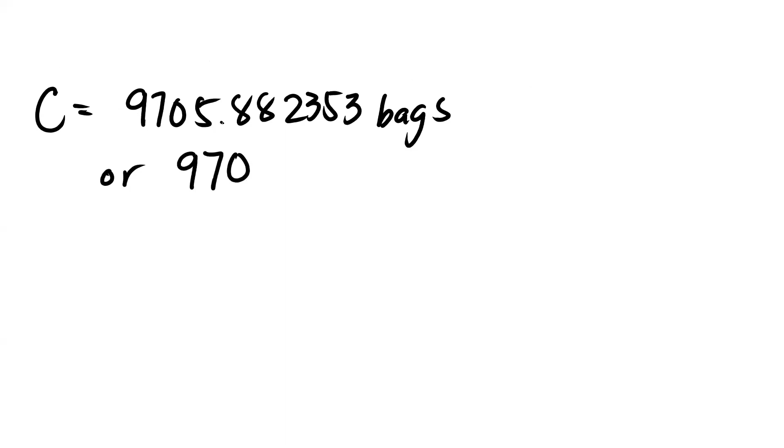So kung isa-summarize natin: cement is 9705.882353 bags. So for round off na natin, 9,706 bags. Sa sand naman, pwede nating i-round off siya ng 680 cubic meters, and sa gravel naman, pwede nating i-round yun ng 1,359 cubic meters.

Okay, so next: Engineer Pejana is going to fence his rectangular lot whose dimension is 250 by 300 meters, and the height of the fence is 2.5 meters. So determine the number of CHB needed.

So kunin natin yung area, no? Area is equal to length times height times 2, plus width times height times 2. So yung area is 250 times 2.5 times 2, plus 300 times 2.5 times 2. So 2,750 square meters yung kailangan nating lagyan ng hollow blocks dito.

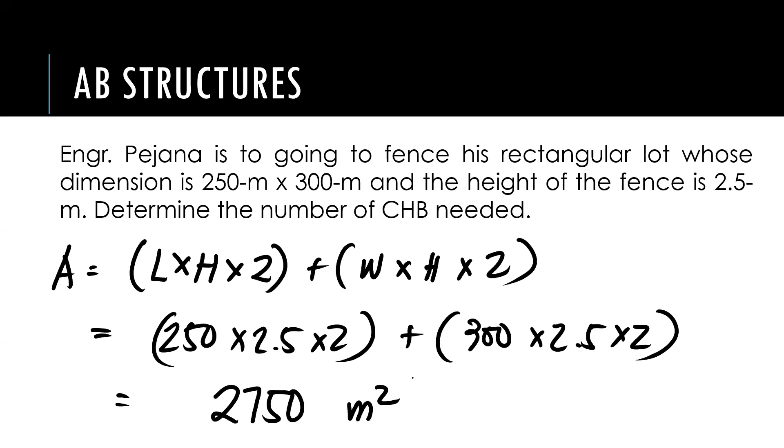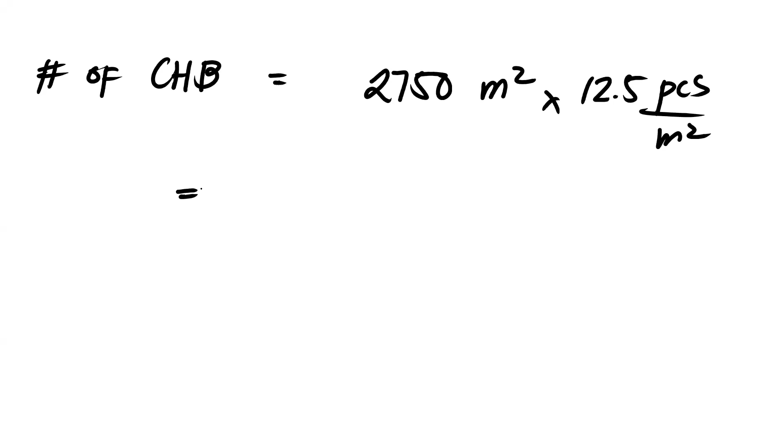Okay, so to compute for the number of CHB needed, basic lang naman. Yung area times 12.5 pieces per meter squared. So pag multiply natin ito, we will have 34,375 pieces na CHB.

Okay, next. Engineer Mendoza would like to build a rectangular room having a 15 by 10 by 3 dimension. Estimate the number of concrete hollow blocks needed, so exclude the foundation. Kunin ulit natin yung area. So we have 15 times 3 times 2, plus 10 times 3 times 2. So yung area of work natin is 150 meters squared.

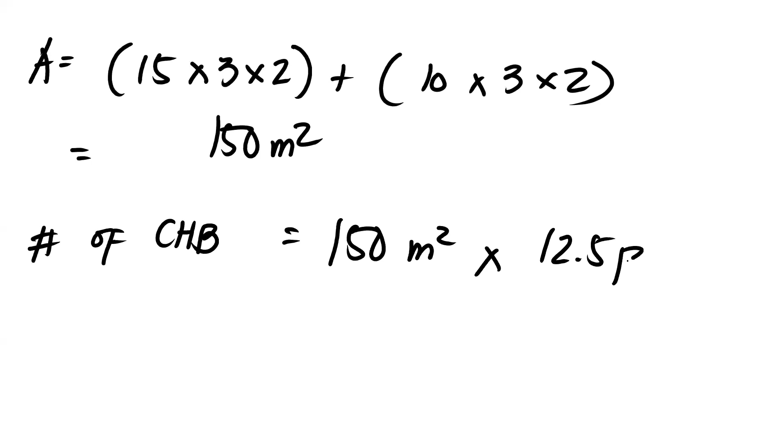So sa number of CHB, equal to 150 meters squared times 12.5 pieces per meter square. So we have 1,875 pieces na CHB. So that's all. Thank you.